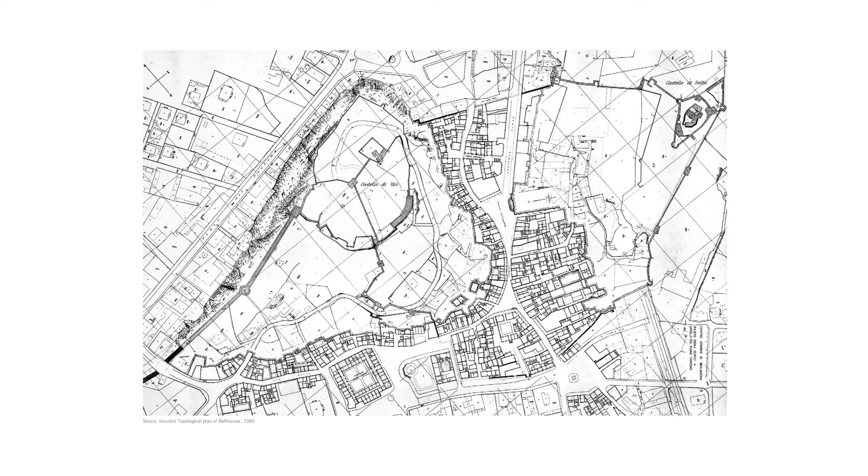Good evening, everyone. Let's talk about the context where we come from, which is Locarno, a place much closer to the northern part of Italy rather than the German part. So culturally, we find ourselves rooted a bit more in the southern area. But apart from that, like all areas of Europe, we are confronted with historical context and with the urban fabric of the context in which we operate.

So we find ourselves always struggling, confronting ourselves between the role of architecture and nature as the main feature and canvas of our intervention. We do believe, though, that architecture should have inside a very strong feature that can give timelessness to its vision and its purpose.

And we strive to find this kind of approach in our buildings, as we did, for example, in the museum in Minusio, where we built a pavilion in a historical context, and the aim was to blend with this urban fabric, but at the same time try to renew the community's feelings of belonging to a place. So architecture should also, in our opinion, create the place.

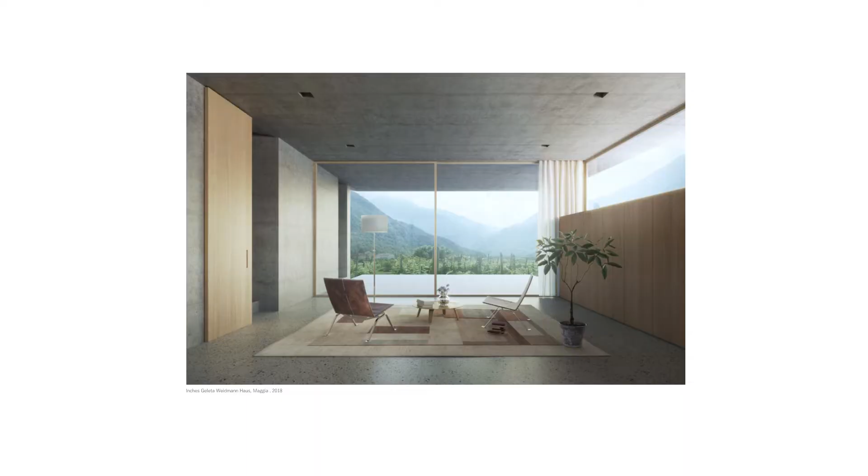And when we intervene in a context such as we did for the Weidmann House in Valle Maggia, we took reference from vernacular elements of the landscape and translated them into architecture. So how about going back to the idea of living under a shelter created with this massive concrete roof? Taking inspiration from the Splui, vernacular elements created by farmers that founded shelter underneath a rock, we thought this contemporary house could have the same Stimmung.

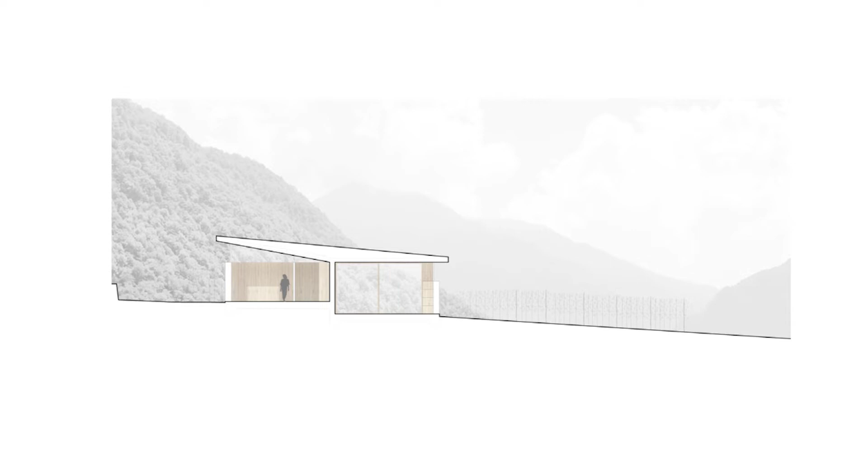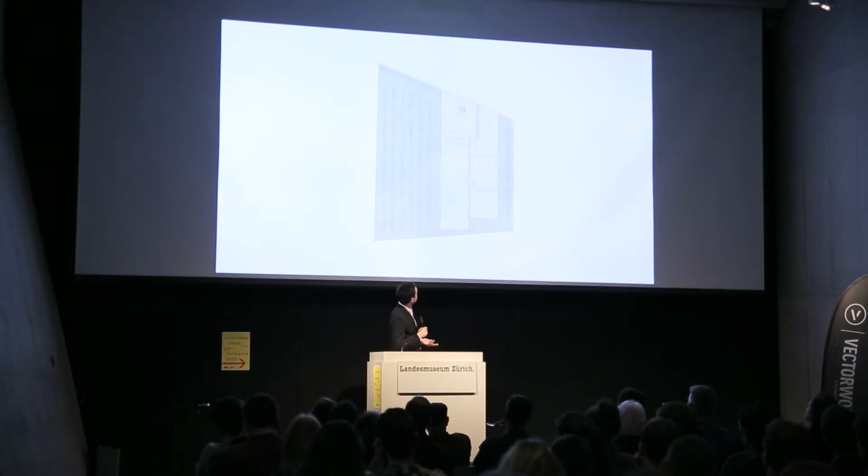So the house is covered by this massive concrete element, which also creates a division—the tectonic of the building divides the living area and the sleeping area, and the interior and exterior spaces. So we took reference from the vernacular and translated it into contemporary while working in a valley.

But what about when we work in a context that is completely different, such as the city? We believe it's important to take reference from what came before us—contemporary architecture of the masters as a reference of typology.

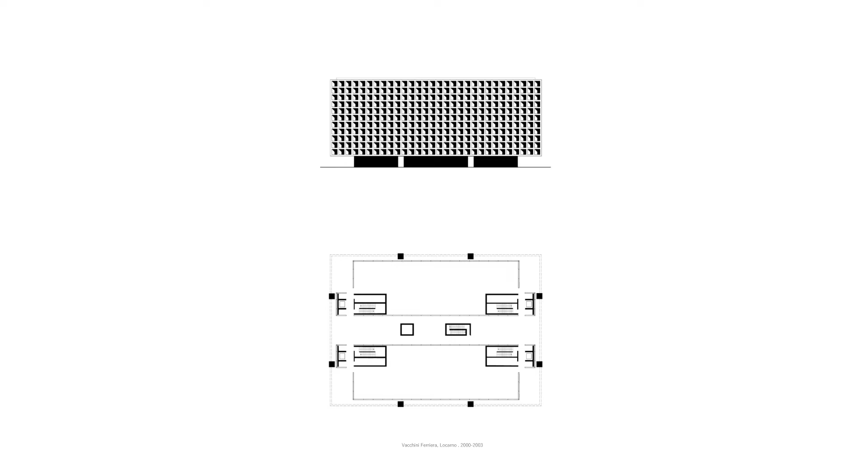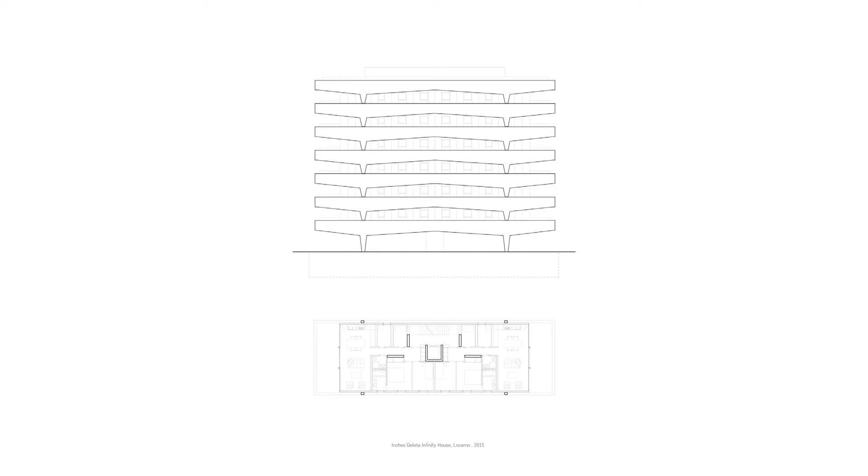In this case, Vacchini was a reference for us when we developed the Infinity House, which resembles a lot a project we completed. The architecture really took inspiration from what was previously constructed by those who, for us, were masters and who put the accent on structure as the main feature for the expression of a building. So we believe that for this new urban element, we had to look back.

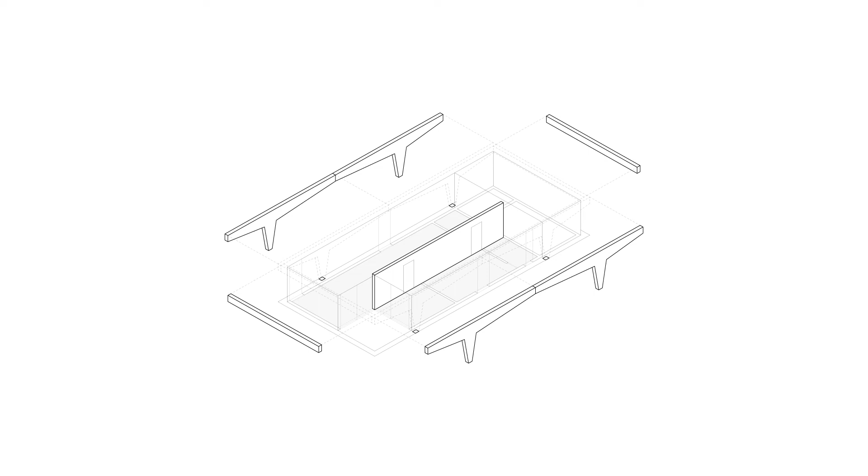Therefore, the Palazzo Pioda is basically an envelope framed by its structure. So you only have two elements—the perimeter structure and the inner cantilever wall—that create an overall look of a building elevated from the ground, with the 6 apartments, one on top of each other, framed within the structural element.

This was a private project, our very first urban intervention—before we only did renovations. Going from private to public, I'll briefly show a competition we won with my wife in 2017, which was a school extension.

The existing school from the 70s was elevated by 1 floor, and our goal was to blend in with the existing structure using a very light structure that also connected the massive concrete basement to the sky. So you have this light rooftop, which contains a canteen where kids eat and other complementary spaces.

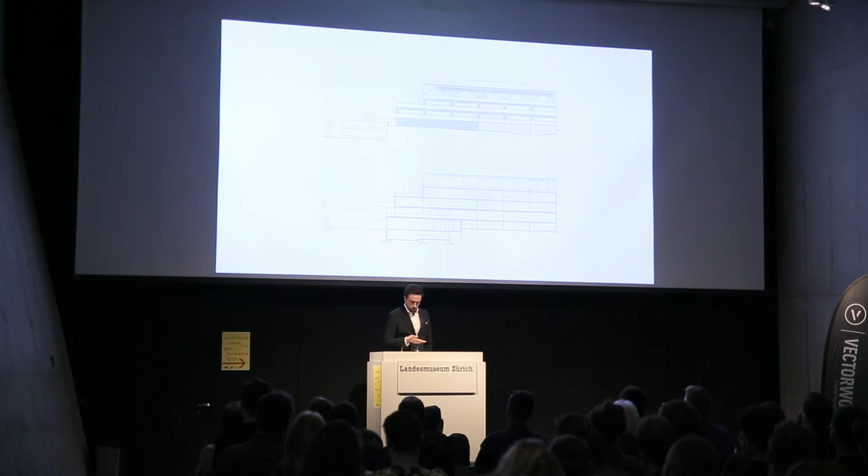The rooftop follows the original structural grid, but at the same time doesn't touch the slab of the existing school—it's actually elevated from the roof and attaches itself to the edges of the existing construction. So, like in the Palazzo Pioda, it's the structure that plays the role of the primary actor.

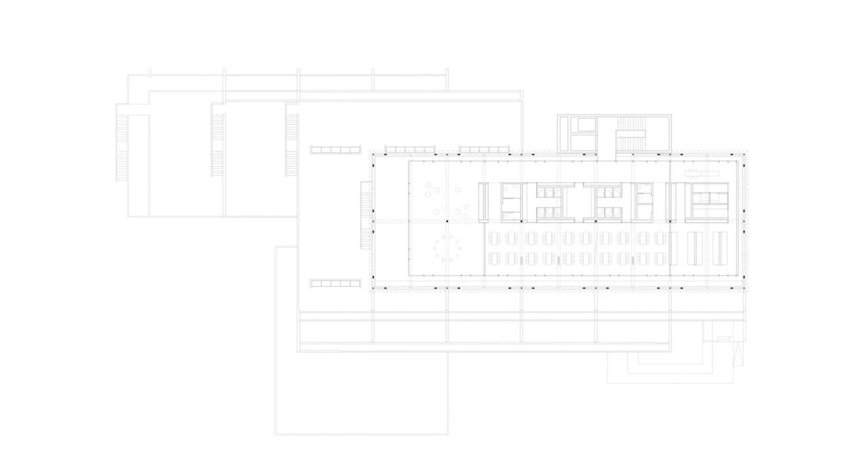You have the perimeter and only 4 pillars in the middle, and a central core that divides the spaces. So the structure, once again, plays the role of main actor from the outside, but also from the inside. We call this project Fil Rouge.

We believe that the Fil Rouge, in this sense, is not only a way to express the construction and the expression of the building, but it's also a way to connect our work to those of the masters of the past, who for us are a reference and also a guideline for future projects.